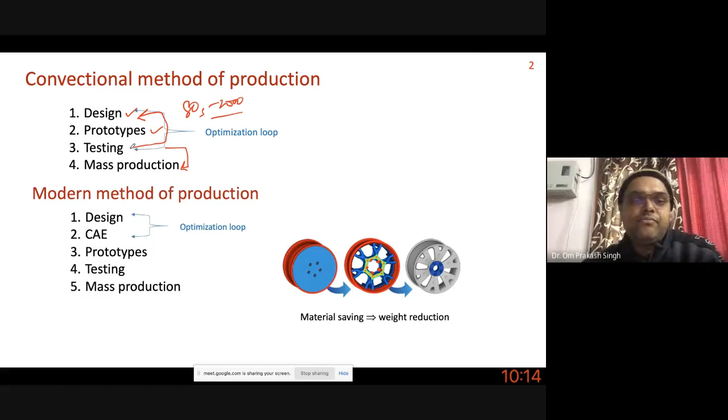But now things have changed, and changed on a large scale. So how does the modern method of production work? Design is the same in the earlier process and the new process, but it has become more of a virtual environment, not using drafters. We use computer tools, design software, and after design we do the CAE. CAE is a general term for computer aided engineering. Whatever you do through computers is called computer aided engineering.

Here there are various methods. One of them is CFD, then the finite element method, and the boundary element method where you go for noise, and many other processes and tools. In CAE you look for all the design related issues, then change the design and come back from the CAE result, because CAE, whether CFD, FEM, or any other method, is a tool to take decisions. If you cannot take a decision in industry, there is no point in doing CAE. CAE helps you take a decision from which you can actually modify the design.

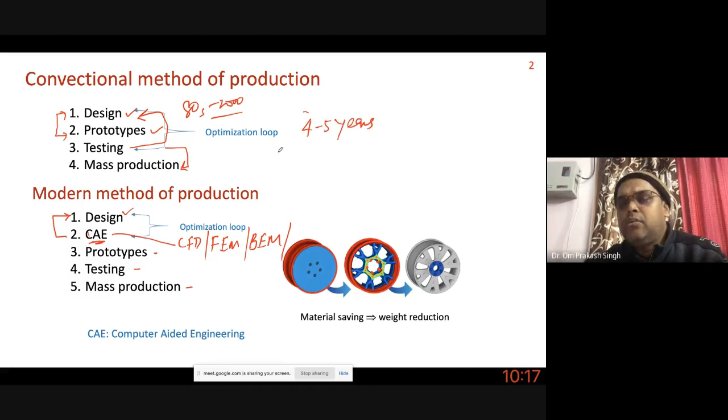Whereas earlier, before mass production, the design iteration used to happen between design, test, and prototypes. With the introduction of these new CAE methods, the life cycle of a product, from the concept idea till mass production, has reduced drastically. To give you a scale of reduction, let's say you are producing a car. Earlier it used to take 4 to 5 years considering all the design concepts, then slowly it came to about 2 years.

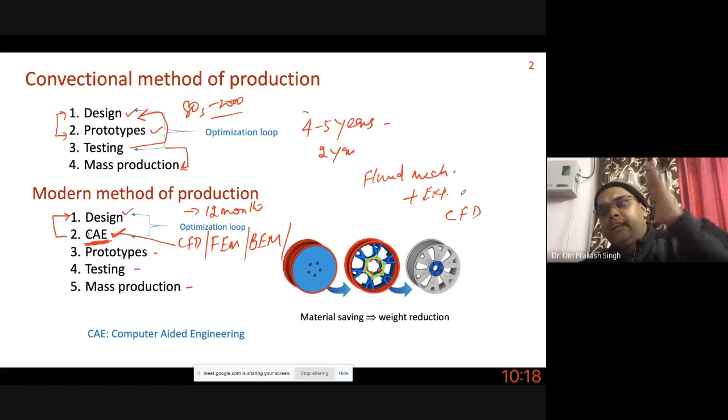Now, with CAE help, one can launch a product in less than 12 months, if the industry has skilled CAE professionals. But unfortunately in academia we don't generate skilled people who are well versed in CAE tools. Mostly in academia we are stuck with teaching fluid mechanics plus a little bit of experiment. And CFD is taken as rocket science, which only comes in your 8th semester as an elective, and in some colleges it's offered and some it is not.

But with the advent of computers, and the tools having become so easy, CFD and fluid mechanics should be taught together in the same course. And for that, the faculty will have to upgrade their skill level so they can teach both fields in the same course. With CFD we can do optimization, or for that matter we can do optimization with the finite element method on structures.

But one should not confuse FEM and CFD. Once somebody says FEM, the first thing that comes to mind is that it is a structural thing. But no, the finite element method is one of the ways to solve CFD, to solve the governing equations of mass, momentum, and energy, which are the conservation equations. CFD basically uses the finite volume method. Of course, I will not be covering anything as such.

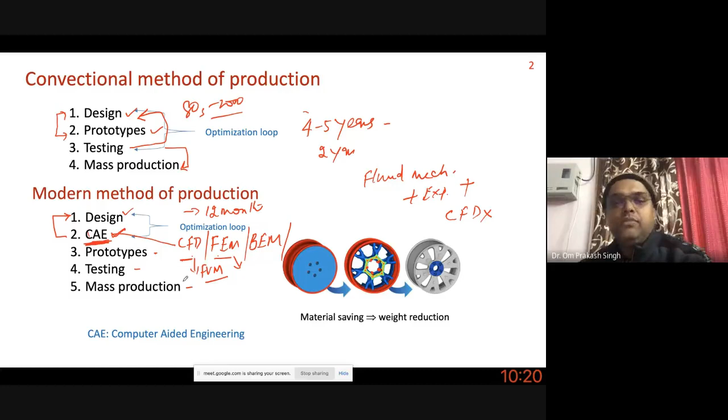Okay, but generally FEM is preferred for certain kinds of problems, structural problems, because of their efficient way of handling the displacements and all the things. Whereas finite volume and CFD methods are generally used for fluid related problems because they conserve the energy in the entire flow field.

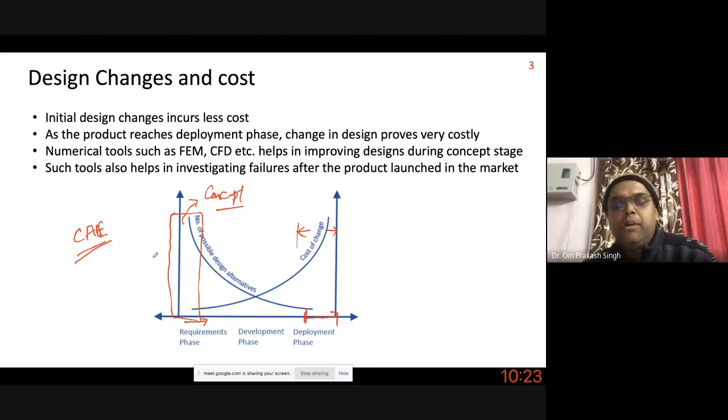Freshers, the graduates from colleges, hardly have any experience. This is one of the reasons industry doesn't prefer freshers. But one can ask the question: unless they work, where will they get the experience? That's the simple question. But while working in industry, I realized that even if industry is willing to hire a fresher, the problem is it takes about 3 years to train them on these CAE tools or other related stuff. After 3 years, an individual can actually start contributing to the growth of the company.

But the problem is after 3 years, the person who has got this training thinks that he deserves more, and he will write everything in the biodata, whatever training he has got, and he will switch over. So industry doesn't prefer freshers because they leave after some years. They'll change the company for many reasons, and one is the salary, because now they have learned everything. So if these years can be reduced in academia itself by giving them proper training, only then can we bridge the gap between what industry needs and what we are actually training them in.

In fact, the main purpose of producing engineering graduates is so they can do some engineering work, as simple as that. But many of them are not aware. That's the unfortunate part. I'll go to the extent that many are not even aware how to operate a proper operating system, how to rename a folder, how to install. I'm offering a CFD course.

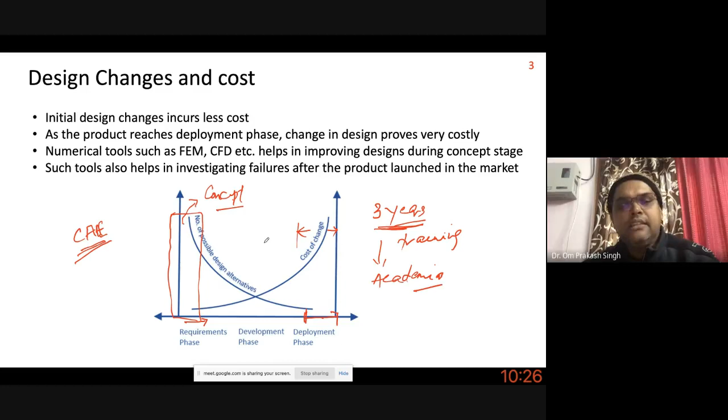So spend a lot of time with your computer, doing this, then doing this, install, uninstall. Only then you will have more free hand in doing a lot of other stuff. Okay, and this is one of the reasons: if you're not well versed with the computer, then learning the software is a remote possibility.

Okay, so when you do CFD, what we need to run a CFD model is, as I said, some pre-processing technique. You need to design the CAD, okay, computer-aided design. In academia, we deal mostly with simple geometries. But when you go to industry, the geometry and the problems become more complex. Okay, so after CAD generation, we go for mesh generation.

So this is a must in the CFD process, and for most industrial problems, 80% of the time basically goes into just setting up your CFD model. Okay, just pre-processing the CAD, then going for mesh generation. I'll also talk about how to generate good quality mesh. Okay, and then post-processing takes not much time.

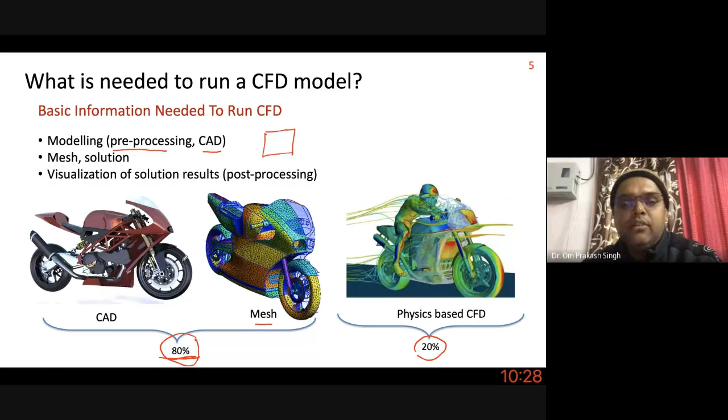Of course, now our computational resources have improved a lot, and with experience, this post-processing time has been reduced drastically. Okay, since 80% of the time goes into our pre-processing part, I'll be focusing more on the mesh generation pre-processing technique, so the audience can make a guess what needs to be done and what needs to be learned to develop a good CFD model.

Okay, so now why is meshing done? Let me explain what is the importance of meshing. So when there is a pure surface or a CAD model, basically it has an infinite number of points. A surface can have an infinite number of points. Okay, and the degree of freedom here, see, I've written here, is 6. Basically, I use the same example to teach a finite element model, where the degree of freedom is the unknowns. So here you can think of the degree of freedom as the number of unknowns.

So at each node, suppose there are, let's say, equations: one conservation equation, and basically 3 momentum equations, and if you are solving, let's say, the energy equation, there will be one more unknown, temperature. So 3 momentum and 1 temperature equation, 4. Okay, so you have U, V, W, and T, the 4 unknowns. Of course, pressure will also be there, but we use the continuity equation to iteratively solve the pressure.

So at minimum, when you solve a fluid flow, a heated fluid, you need 4 unknowns at each node to be solved. So the degree of freedom in that case will be 4. So if the number of nodes keeps on increasing, the degree of freedom also keeps on increasing. So when there is no division, no meshing, it will have an infinite number of equations, because we solve each equation at each node. Okay, so this is impossible when you don't mesh.

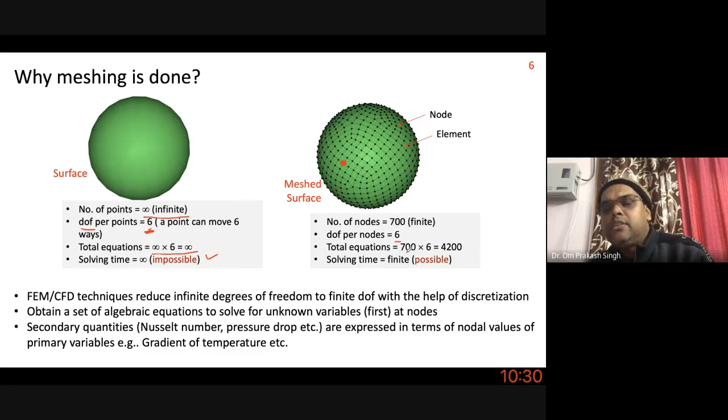But on the other hand, if you have a finite number of nodes and a finite number of unknowns, solving the total equations also becomes limited. Okay, and it all again depends upon the resources you have. Now one can think of using a very fine mesh. Fine mesh means the spacing between the 2 nodes is small. To get better results, the spacing can be reduced by using a small grid size. In that case, the number of equations will also be very large.

So your computer will slow down, because it will solve each equation; each node you have to assemble in a matrix. Then you have to solve it with some special algorithm. In CFD, we call it TDMA, tri-diagonal matrix algorithm. Okay. So again, there is a compromise between the number of nodes we use and our computational resources.

But there is one more issue. One can argue how many nodes and elements, what is the element size, how many total nodes there will be. Because there is no set, hard and fast rule for what the element size should be or how many nodes one will use.

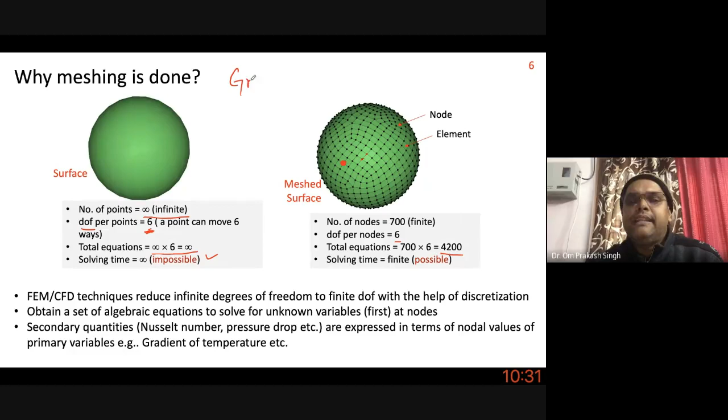Okay, so what we do in our research, or even in industry, is to go for what is called a grid independent test. So here, for a given variable, let's say this is the number of grids, and some result. The result may be a temperature, it can be a Nusselt number, it can be anything.

So slowly, if you keep on increasing the grids, after some time it will become flat. So there is no variation. So from this point onward, you can assume that further increasing the grids is not changing the result. So that point, or that number of elements, you can use further for your next level of analysis and post processing.

So to reach that, you have to keep changing the number of grids, and slowly you will reach a number of grids where maybe there will be a slight variation of 4%, 5%. Beyond that, there is not much variation. So you can select that number of nodes to present your result.

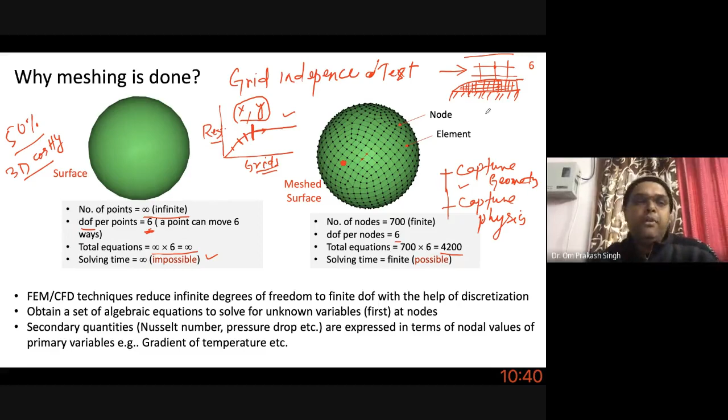So first thing, you think that your 3D problem should go to 2D. Even in industry, I have solved a lot of complicated problems which usually people do in 3D, and I have converted them into 2D. Of course there was a lot of criticism initially, but finally when the end results came, you feel very nice from within.

And even industry, let's say General Electric, GE, they are now into a lot of fields, and initially their main business model was aerospace. Even today there is a group who first does the simulation in 2D models. There is a group who first does hand calculations, initial designing.

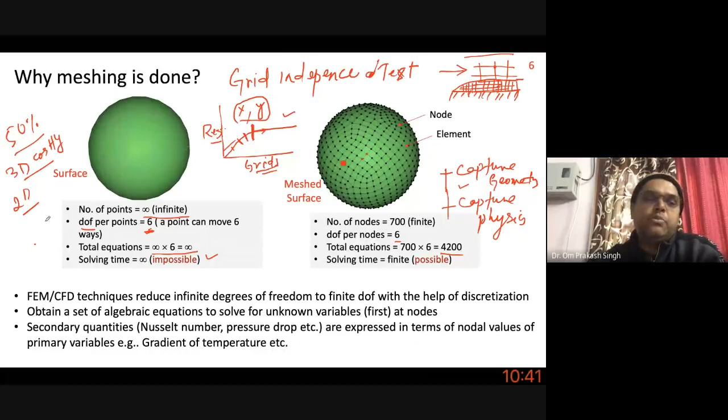After initial designing, the design will go to a group who does only 2D simulations. Then after months of 2D simulation, finally they will pick 1 or 2 designs which they think require 3D, then they develop a 3D model to check that whatever is done in 2D and the theory is fine. So always go out of the box. It always pays in the long term if you think out of the box. There's no hard and fast rule that you solve a problem in a particular way. That's where your challenge of thinking out of the box comes into place.

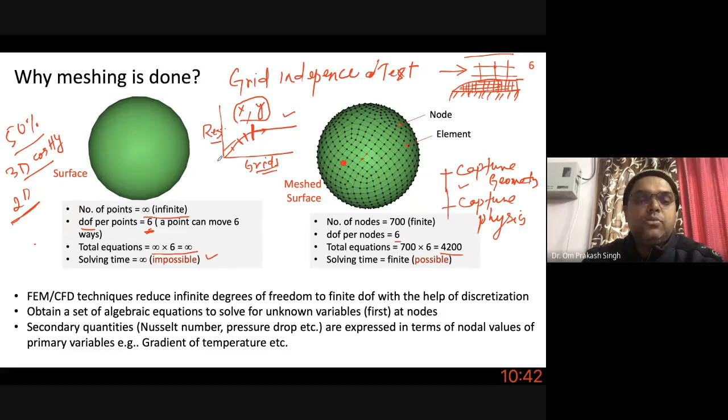So as I said, the purpose of doing meshing is also to capture the geometry. Let's say this is your geometry, and for the sake of representation, if you use 3 lines, we are capturing only 41% of the given area. Now with 4 lines, the percentage captured increases, and slowly as you keep increasing, these lines are nothing but the grid size. In CFD we call this a cell, and this is called a node. If you keep increasing the number of nodes, you are going to capture the geometry in a better and better way. So as the number of nodes increases, the area which we capture also increases.

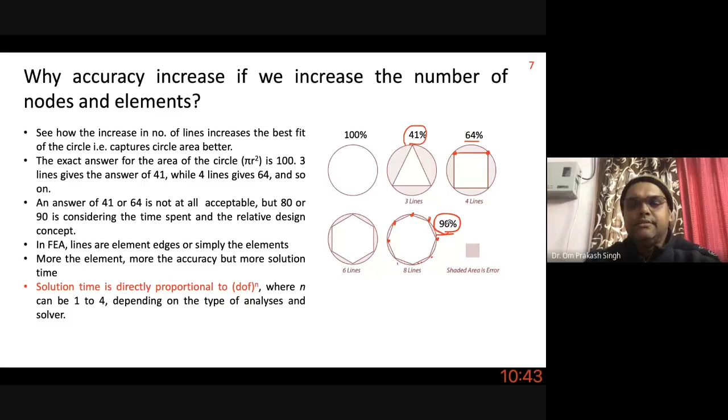So before I go to show some demonstration, there is also something called element quality in CFD. When you are using a triangular element, ideally we prefer it to be 60 degrees. These kinds of elements are also fine up to some extent. One side can be a maximum of 2 times, or maybe 2.5, or in some cases we use 3 times. In the boundary layer we use 40 times.

As I said, the elements in the boundary layer are basically quad elements in 2D. Quad means quadrilateral, or in 3D it becomes a hexahedral, a brick. In Fluent, I think they call it an inflation layer. And if you're using software like STAR-CCM+ for CFD, they call it a prism layer. Basically, they are all dealing with the boundary layer. And in other regions, apart from the boundary layer, ideally we prefer a uniform square element.

Okay, up to 4 times stretching is allowed, 1:4 ratio. And a little bit of distortion is also allowed. Instead of 90, you can have 60. But if you are doing a mesh in such a way that the angles and the stretching are more, then what will happen is your model will not converge. Convergence in the sense that when you run a model, continuity with iteration.

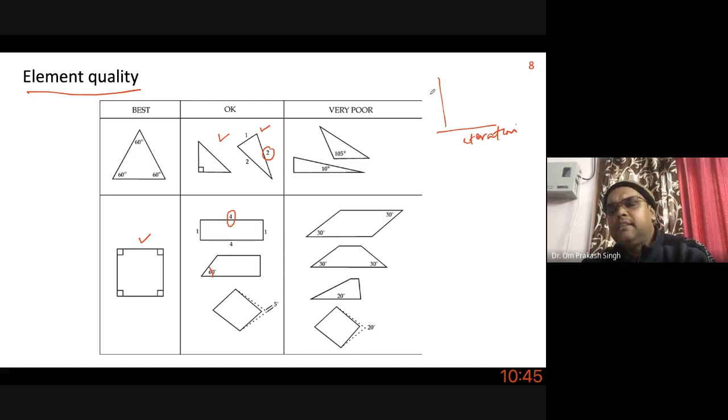With iteration, it can be continuity, it can be energy. So slowly with iteration or time, it should come down. Your residuals should come down. Ideally we prefer the order of 10 to the power minus 4, or minus 6, depending on the problem. When your convergence reaches that level, you can say your model is converged. But in some cases, students report that it keeps changing, it fluctuates, and it never comes down.

So the first thing you should look at when there is a convergence issue is your mesh and mesh quality. Then you should look at other things, like selecting a suitable turbulence model, or whether it is a laminar problem, whether you have applied proper boundary conditions, or sometimes you need to check the time step, or steady state. Those things come later. But the first thing when you have a convergence problem is always to look at element quality. This is the basic.

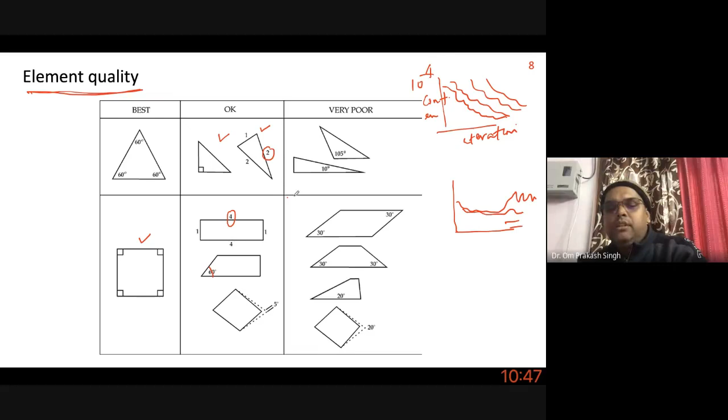This is the founding block of your CFD model. First the mesh comes, then boundary conditions come. So you should aim to generate a quality mesh whenever you develop a model, or whenever you run into a convergence problem. I'll also show you how mesh quality can distort. There are some terms to measure mesh quality. One is called skewness.

Skewness is basically, let's say in a quad element, if you draw lines through the midpoints of the element, the angle formed between them should ideally be 90 degrees if it is a square. But some deviation is allowed, and it should preferably be less than 40 degrees. These checks are inbuilt in software nowadays, so with just one click you can check it.

Then, as I said, aspect ratio. Aspect ratio is the maximum length divided by the minimum length. We allow 1:4 to some extent, and in the boundary layer we go up to 1:40 as well. In the boundary layer it is possible because the flow is aligned along the wall, so it will not be much of a problem. Usually, if you develop a boundary layer mesh using software, it is built in to allow that ratio. Otherwise, if you cannot have this much stretching, you will have to put a lot of mesh near the boundary layer even for small or simple problems. So this takes care of all that.

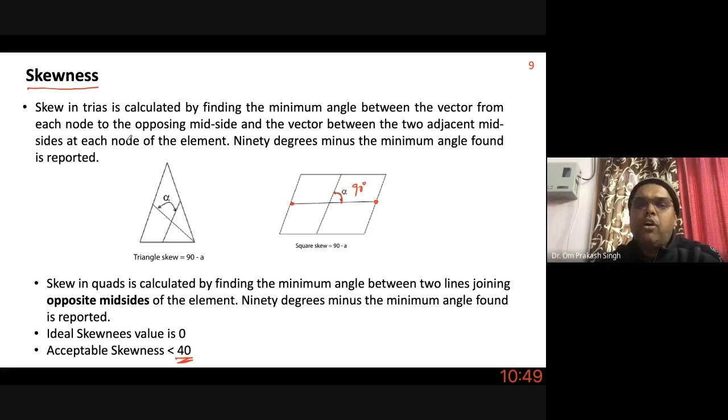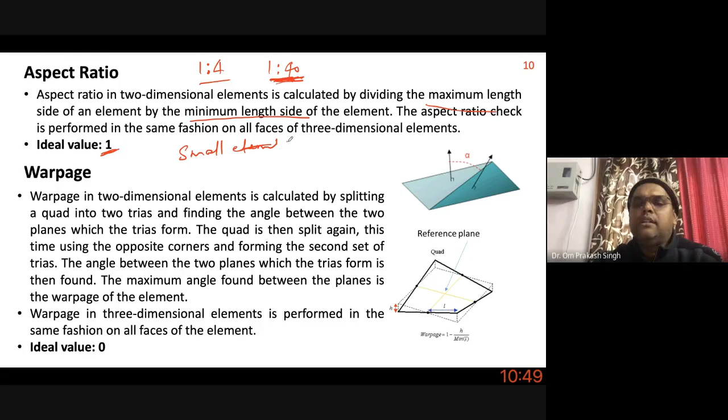The ideal value should be 1. How do you get this ideal value of 1, for aspect ratio or skewness? The best way is to use a small element or grid size, whether it's a grid, an FEM element or shell. If you use a small grid size for a given surface, the aspect ratio will automatically approach 1. As simple as that. You do not have to worry.

But when there is differential meshing, where some surfaces require fine meshing and some require coarse meshing, you have to be careful. We allow 1:4 to some extent to make up the transition zone. If you go for 1:10 or 1:20, your elements will automatically distort.

There is one more element quality check, which is warpage. To make you understand, ideally our element should be rectangular and on a plane. But if there is curvature, let's say a sphere, and you are trying to capture this geometry with a mesh from here to here, since the mesh is trying to capture the geometry, it will also change; it will curve.

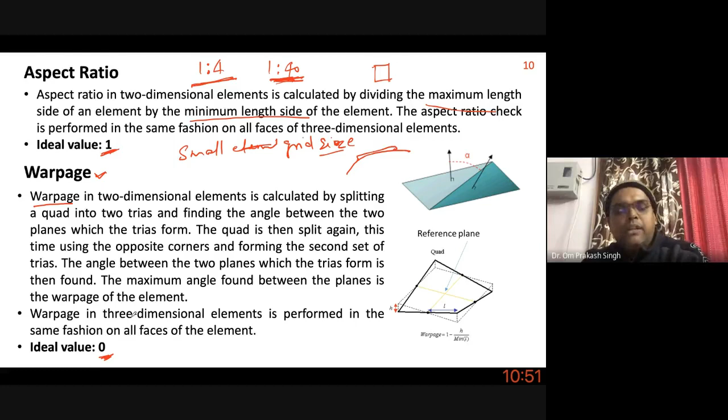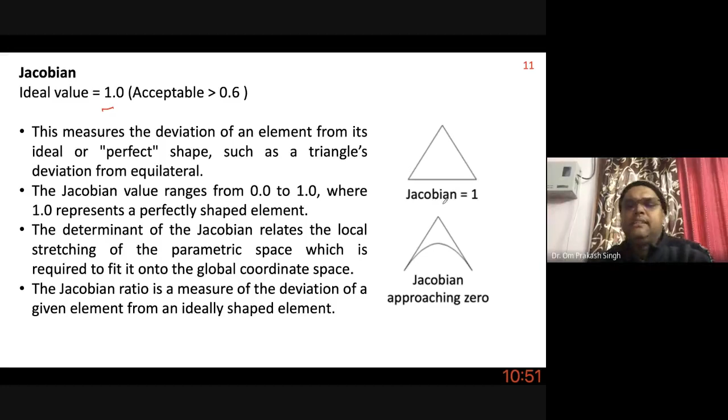So basically warpage is the degree of curvature the element takes, or how far it deviates from the plane. Ideally it should be 0 in most scenarios, but some variation is allowed. Similarly, there is the Jacobian, whose ideal value is 1. It is basically the shape deviation, how far it deviates from the original shape.

Okay, so to drive home a point, see, this is the boundary layer. This video, I hope you must have seen in your fluid mechanics course. The white color is nothing but the hydrogen bubbles generated by putting an electric wire in the fluid, and if you pass the current and make the flow in the horizontal direction, it will generate uniform bubbles.

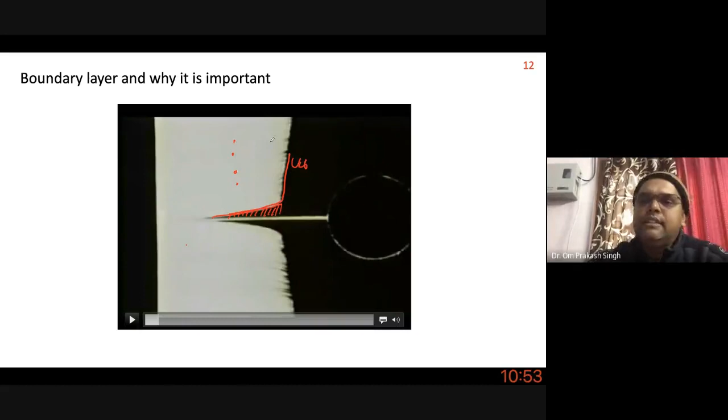Now there is a surface; the white color which is visible is a surface having some roughness. Because of this roughness, the fluid will basically form a boundary layer. You can see from here, and going away, this is the U infinity. In this small region, this is the boundary layer. Away from the wall there is not much change; the velocity is the same.

So if the velocity is the same, you can see this shear stress tau, which we study in Newton's law of viscosity, tau = mu del u by del y. It says the gradient, or change. This derivative is nothing but a gradient. This gradient is basically 0 here, because everywhere the velocity is uniform. Only in the boundary layer is there a change in gradient.

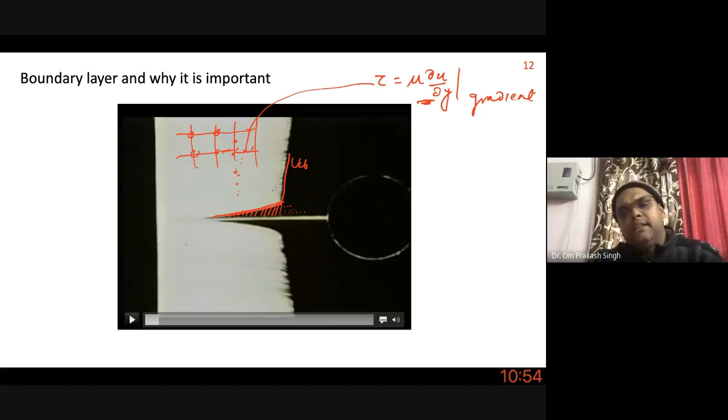So when you do CFD, you have to put more effort in this region. The rest of the region can have a coarser mesh. If your mesh is like this, it can be like this; it doesn't matter, because the velocity here and here is almost the same. It's not affected by anything else. But in the boundary layer, you have to put very close nodes so that you are able to capture this variation. So most of the resources we put in the boundary layer. Okay, I will not go much into detail.

Before I go for some demonstration, I will explain what the fundamental problems are that we study in heat transfer and fluid flow. Just think, you must have studied a heat transfer course, fluid mechanics course, or some related courses. The purpose of

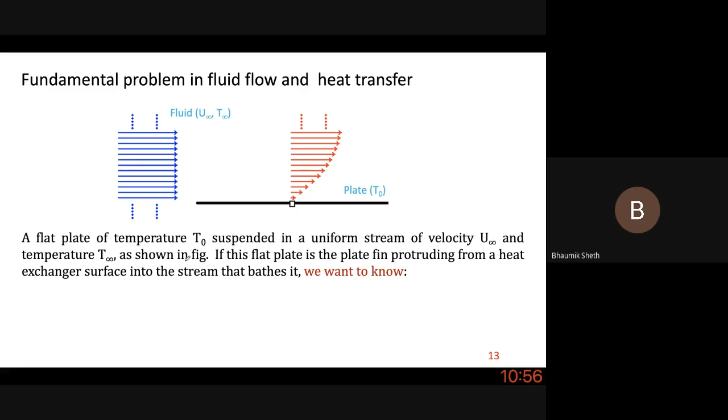Just hold up. Any question? Hello, sir. Please unmute your mic, sir. Oh yeah, sorry.

Okay. Now see, the purpose of studying heat transfer and fluid flow is only two. You will be surprised: you have read such a thick book of fluid mechanics and heat transfer, so how can it be only two? There are various chapters, isn't it? So let me show you how only these two things are there, even in CFD which we study. Now there is a plate and there is a fluid flowing over it.

What could be the purpose of studying this plate? This plate can be anything. It can be the surface of an aeroplane, the surface of your laptop, the surface of a PV panel. It can be anything; this is a general flat plate. Now, when there is flow over it, the first thing you should know is what is the net force exerted by the stream on the plate, or in other words, how much force we need to keep the plate in its position.

We call it basically drag force. Of course, drag and lift are connected. This is the basic purpose of studying fluid mechanics; your entire fluid mechanics is devoted to this force. One can ask how it is possible. You have studied fluid statics, fluid dynamics, shear stresses, pressure drop. Just think, these forces, pressure drop, losses, everything can be converted if you know how much force or shear stress there is.

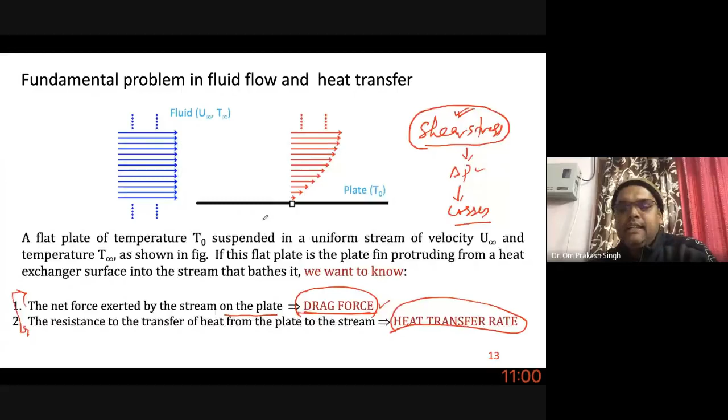Now let's see what you need to learn in CFD. To calculate the drag forces, shear stress into area is the force, and heat transfer is nothing but heat flux into area, where area is width into length. If these two are known, everything in fluid heat transfer can be derived. What we don't know is the shear stress and how much heat is transferred. To get the shear stress, you need the velocity gradient, and to calculate heat transfer, you should know the heat transfer coefficient. These are the two basic unknowns in CFD or heat transfer or fluid flow in general.

Now if you scale it, this change happens only in the boundary layer, near the surface. So del u by del y changes from 0 to delta in the boundary layer. When y is delta, the velocity reaches the free stream velocity. So u changes from 0 near the wall to u infinity in the core of the flow. So in a scale analysis you can express this as u infinity by delta. So to know shear stress, what is needed?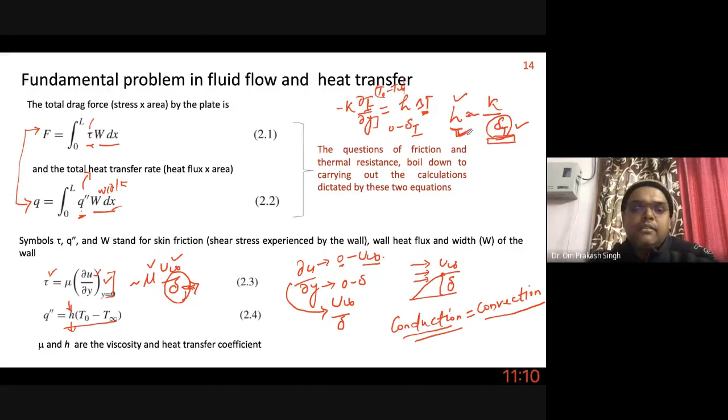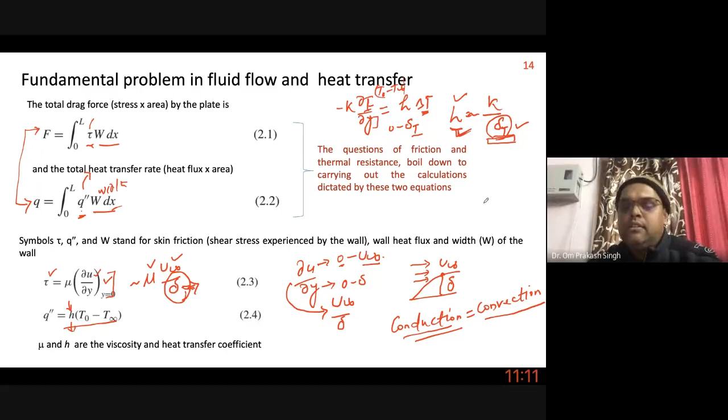So the entire heat transfer which we study will not yield proper results in CFD modeling. So you should be careful where to put your mesh. I think I don't have much time. I have already covered different boundary layers. So let me directly go to show you some demo. Okay.

So let's say, I think I don't have much time. So let's say a simple flow. What kind of strategy ideally we should have? That I want to tell you. Here, this is a simple 2D geometry, and there is a flow from inlet to outlet. And you want to develop a CFD model of this. You can get the geometry, of course, but how to do the meshing?

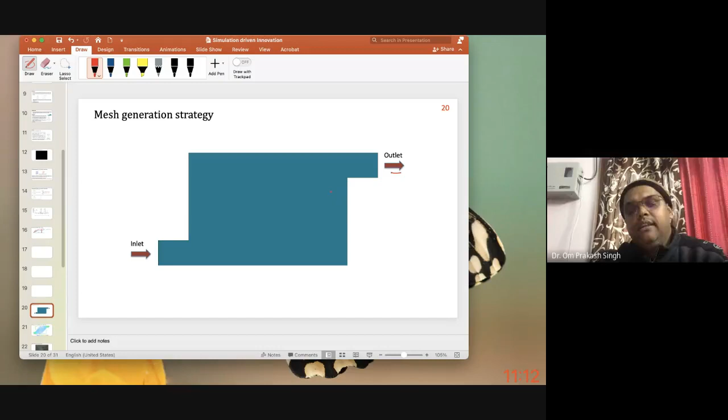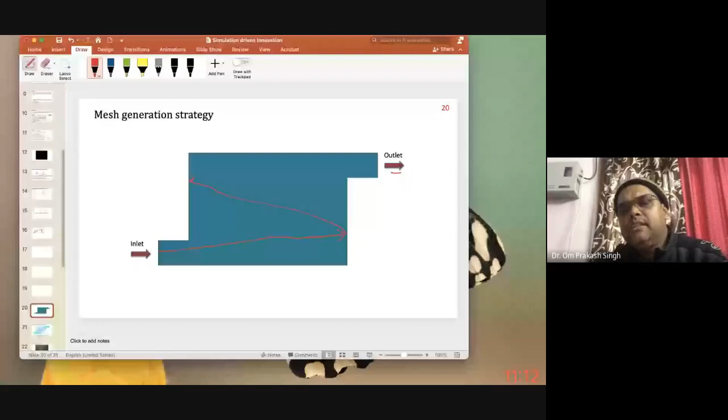Ideally, before doing any CFD, what one will think is the fluid will go here first, directly hit the wall. Then it will hit this wall, and it will come back here. This will be the general thinking. But again, that is not the way the fluid behaves. Just a minute.

So without worrying about how to do the meshing, first one simply has to use a coarse mesh without thinking about the boundary layer or where to refine the mesh, and do the first simulation, which will be rough or partially correct, not 100% correct.

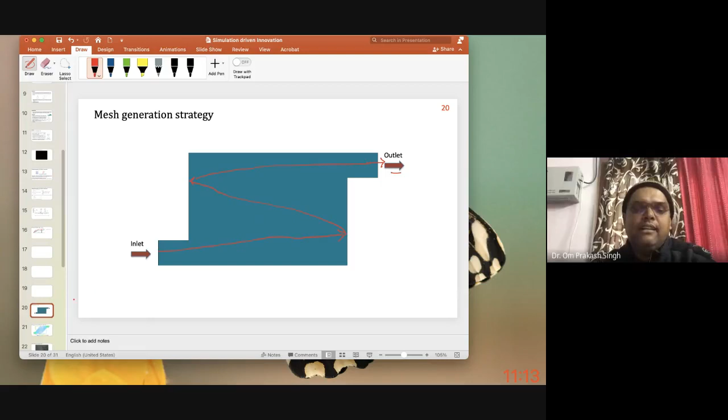So let's say I have done the simulation here. Now see how the fluid behaves. It's very different from what we thought. The fluid basically has a tendency to take the shortest path. So it will go this way, and the fluid is not striking this wall, even though the fluid is coming horizontally.

Since most of the fluid is rushing diagonally here, there is a recirculation around this region. The fluid is rotating here, and the same way it is also rotating in this region. So you should develop a mesh which will capture your flow behavior. At the first instance, that will not happen. So in the second iteration, once you see the fluid flow, come back and change the mesh. Let me show you in software.

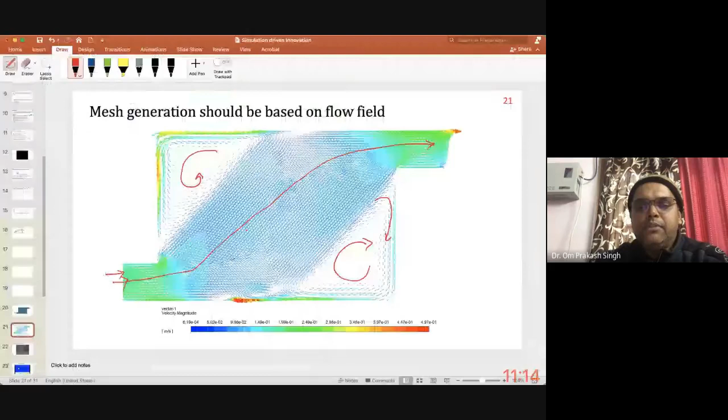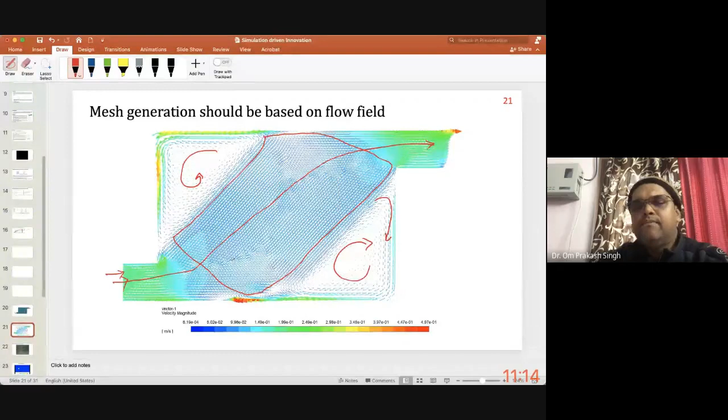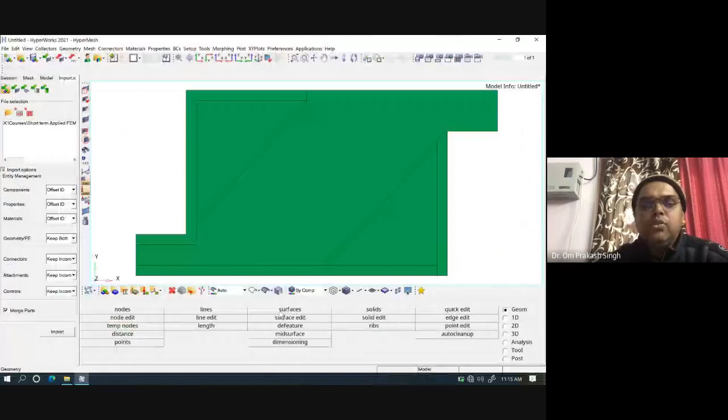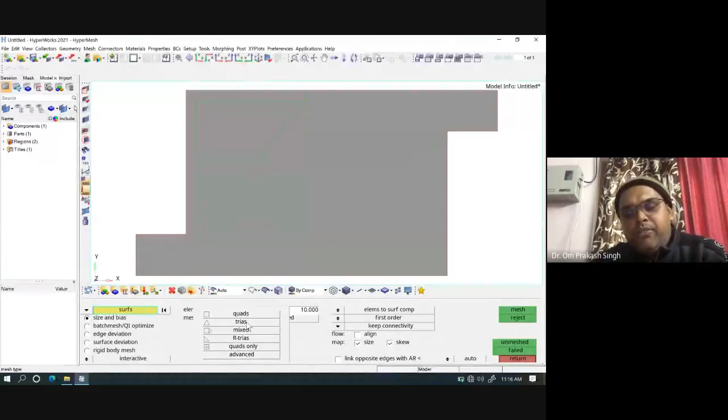Since it's a 2D problem, there are quad elements, so you can use quad. Triangular elements are preferred in regions where there are more reverse flows, let's say behind a cylinder, where a very fine triangular mesh captures the wake region. Quad is better near the boundary layer, or where the flow is more streamlined; quad meshes are needed in those locations.

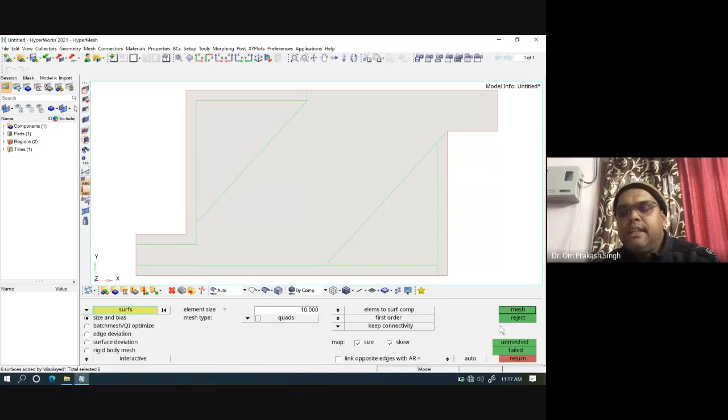But at this point, it doesn't matter what mesh you are using. In the first simulation, without worrying about quality or convergence, you simply have to mesh. This is a coarse mesh. I'm using quad. Because of some geometry partitions, it's using its own algorithm to do the meshing.

This looks very coarse, so you can simply go for further refinement. Even in this case, it's automatically refining without my control; the software is taking its own decision. And if you are happy with this quad mesh, then you can do the first simulation.

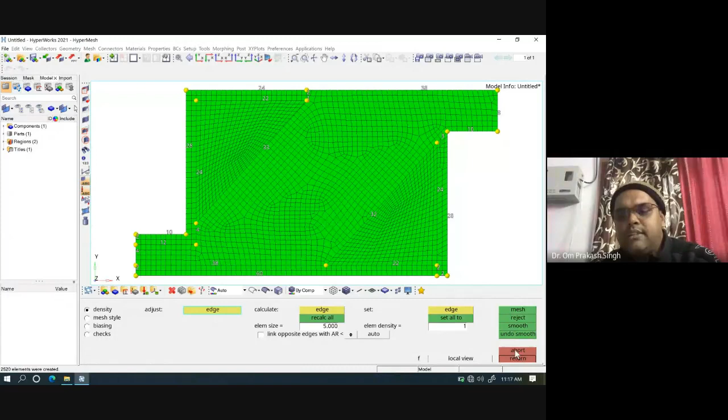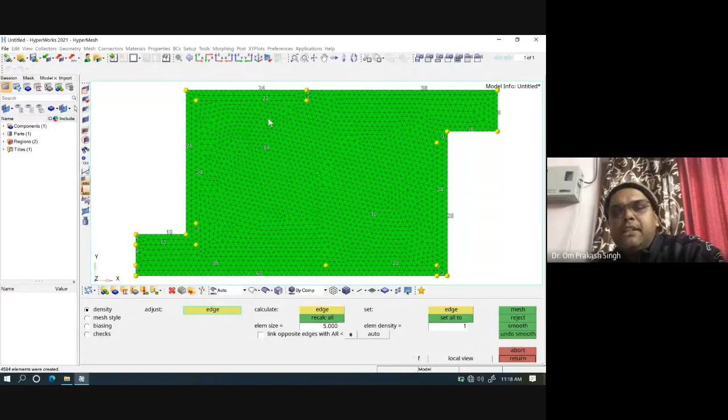If not, then you can change it to triangular, and also you can do the mesh. Now you see here in this case, since I have already done the areas and where to partition the surfaces, the triangular mesh is doing a better job of keeping a uniform mesh. Otherwise, let's say instead of 5 I use 20, and a quad mesh, a bigger element size.

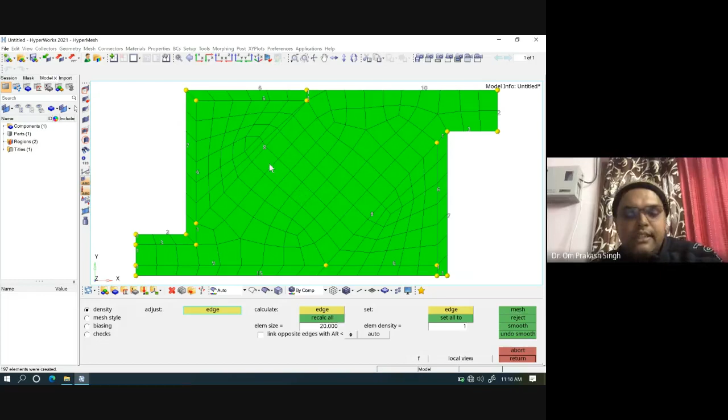So now you can see, as I said, in some regions this quad is already distorted, and it is beyond our limit. Some triangular elements, you can see here, this shape has already gone. So this element may create a divergence problem, because this is not okay. In some locations also you can see here, I hope it is visible to you all, this shape has changed.

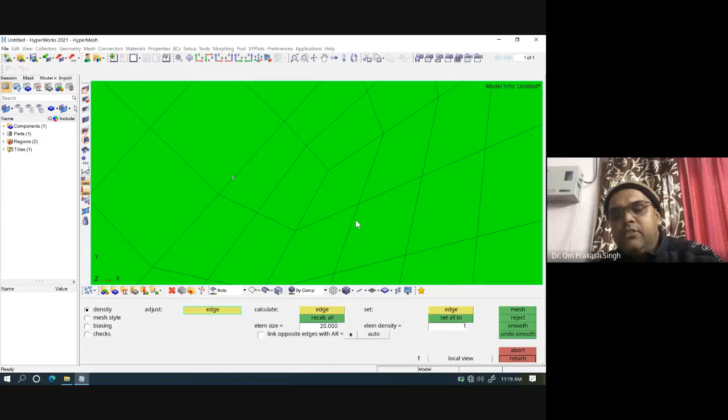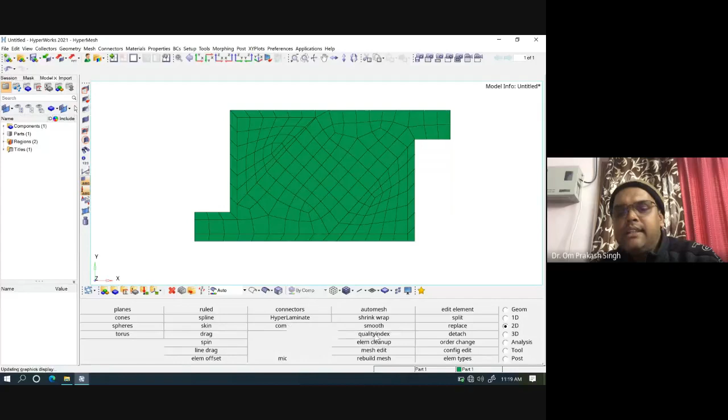So as I said, if you go for element quality, you will see a lot of bad elements, and all software will have provision to check the mesh quality. So if you go, this is the mesh and quality index. If I click on the quality, now you can see on the left hand side it's showing that aspect ratio is 2% failed. Let me zoom it out. The color tells these element qualities are not good, which you need to manually correct.

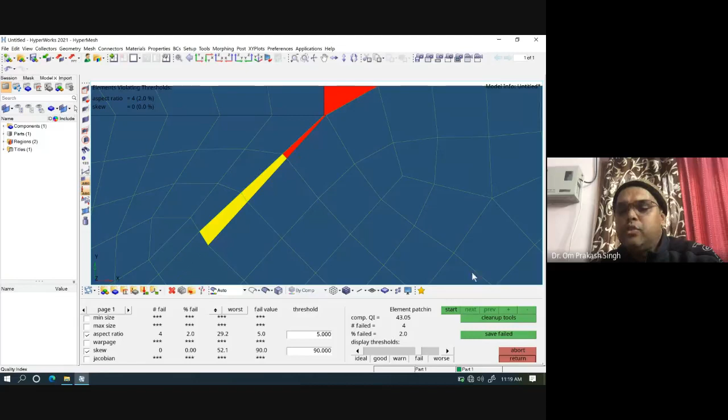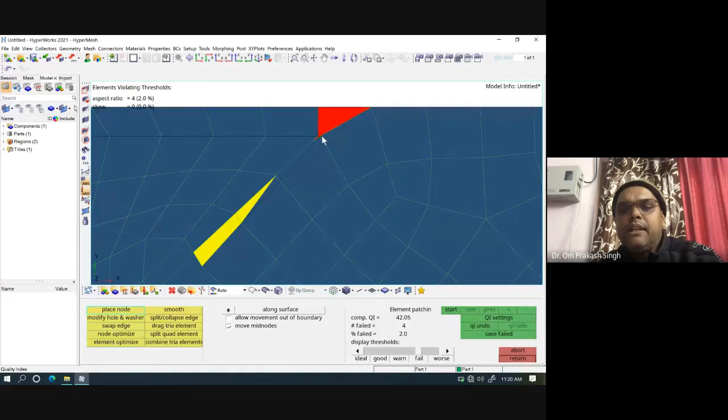So you can manually place a node. Let's say if you drag a node like this, see how the quality is changing, and further the quality is deteriorating. Now this becomes better. Now this element, I'll zoom for you to see, this is the quad element, which is actually gone. So it is a very tedious job.

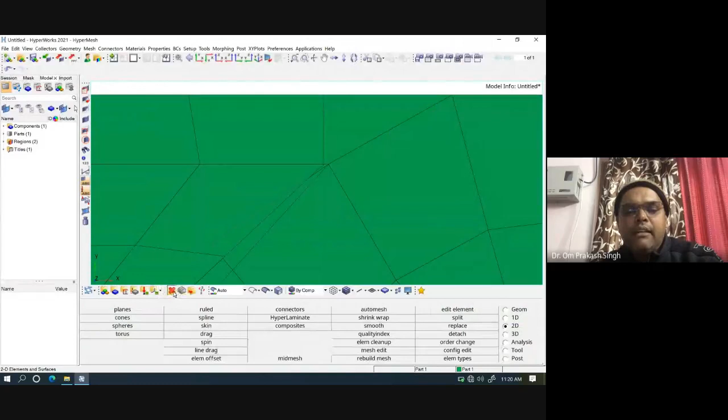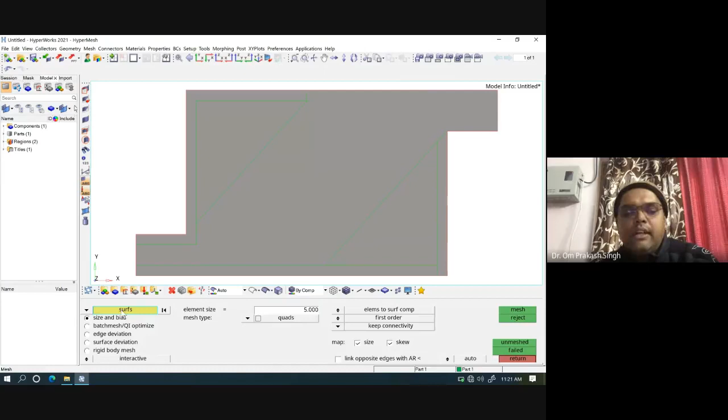So what you should do to avoid this problem is, I'm coming back, I'll delete the elements, and initially you take a little finer element, so the quality will be better. So instead of 20, same quad element, I will use 5. I'll select all the surfaces and say mesh. Now the number of elements have increased, and so is the quality.

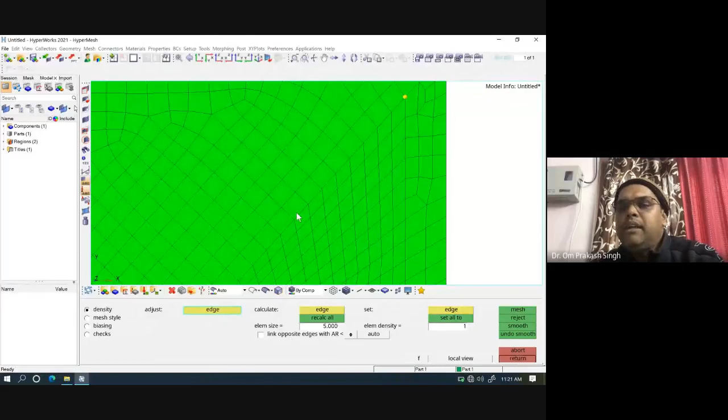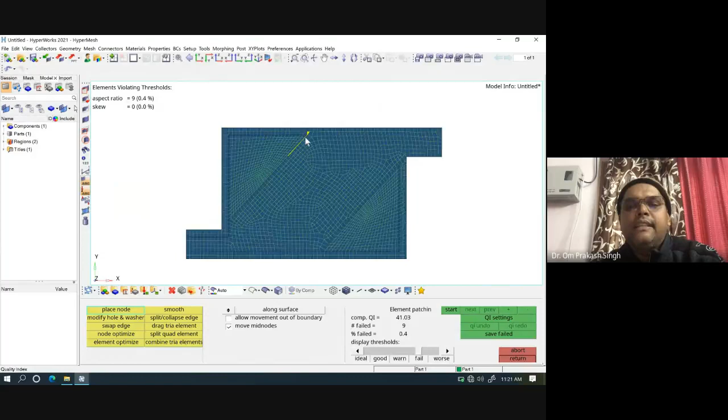Quality has become better almost in all locations. Ideally it is preferred to be rectangular if it is a quad element, but since the number of elements are more, distortion is not seen. Let me check the quality index, see here. There is almost no red color, but there is still some problem because of the definition of the surface. This yellow color shows the aspect ratio: 9 elements have a higher aspect ratio.

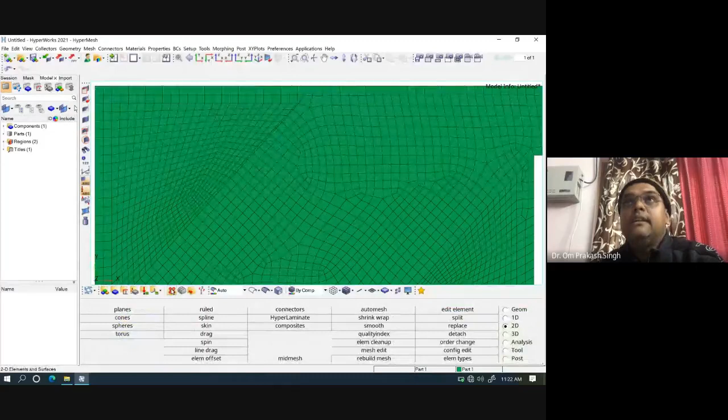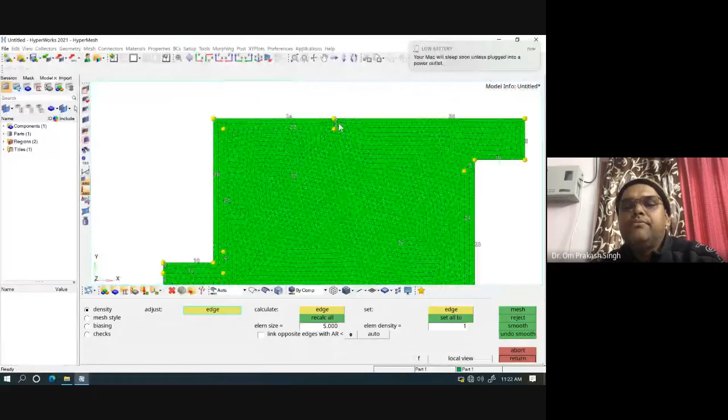So instead of quad, I'll delete, and let's say a triangular element is preferred. A fine triangular element will give much better quality initially; see, it's almost uniform everywhere, except certain elements are bad. But this is not the way. This kind of meshing is only for the initial simulation to check which is the critical region. So in the first run, you don't worry about all these things.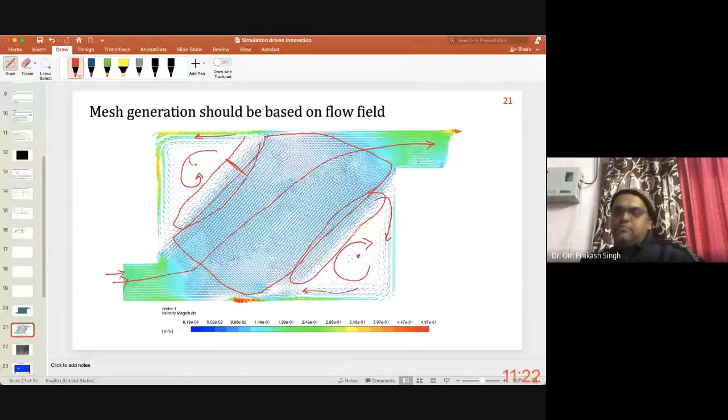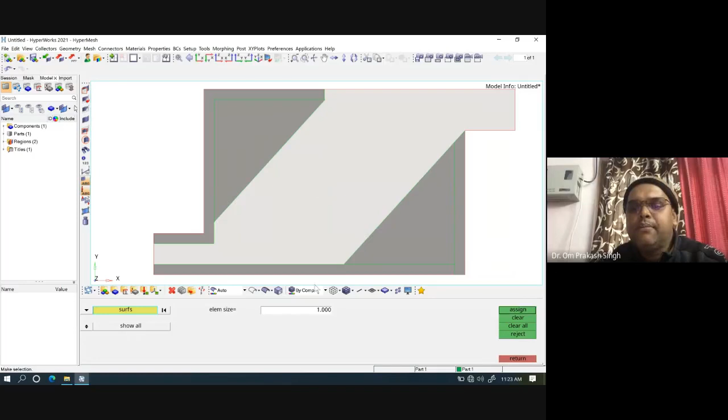And do the simulation. Now in the second stage, when we come back, you can say this surface has an element size of 2, for example, you can assign. I'm just showing arbitrary element sizes, but you can take later grid dimensions. This should be 4.

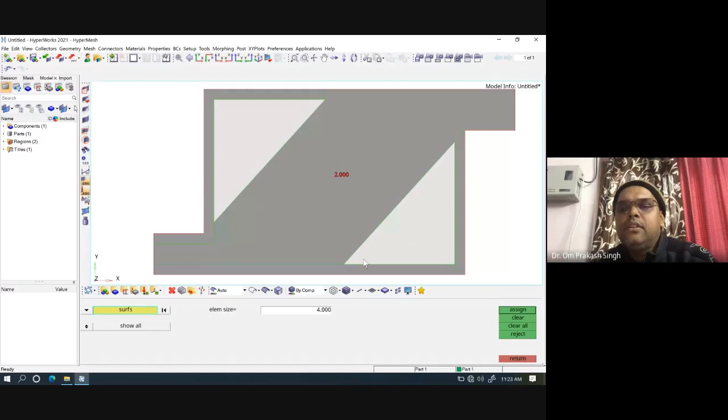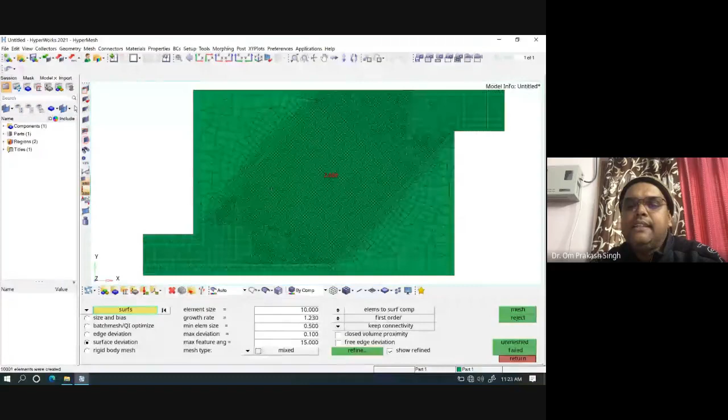Or let me not assign only this. I will say that only the core region will be 2, the rest will be with a higher mesh size. So if you do the meshing, this is a mesh where I have refined only near the region having higher flows.

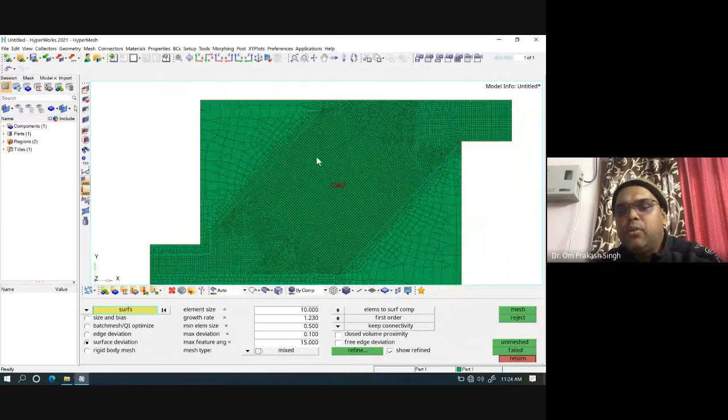You can see the mesh is non-uniform, but I have kept a very coarse mesh here, thinking that my flow is not dominant here. But still this is not the proper way to do meshing, because there are regions near the wall which show higher velocity.

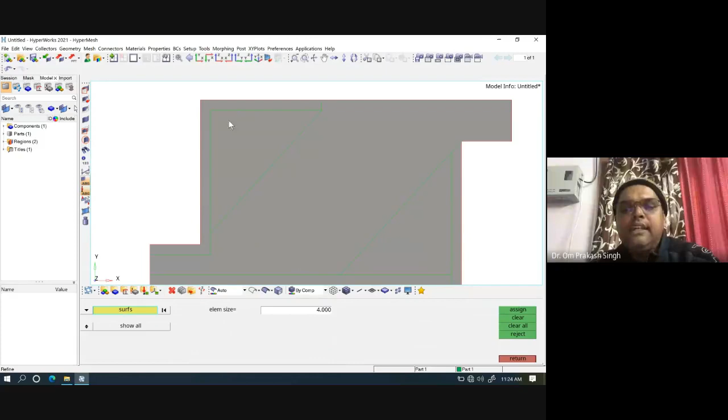So what I'll do is again you will have to just abort it or simply delete it, and again come back to your change meshing strategy. Since these are the elements near the wall, I will say let this be of 1 element size. The elements near the wall should be 1, and the element in the core should be, let's say, 5, and these 2 I'll keep as they are.

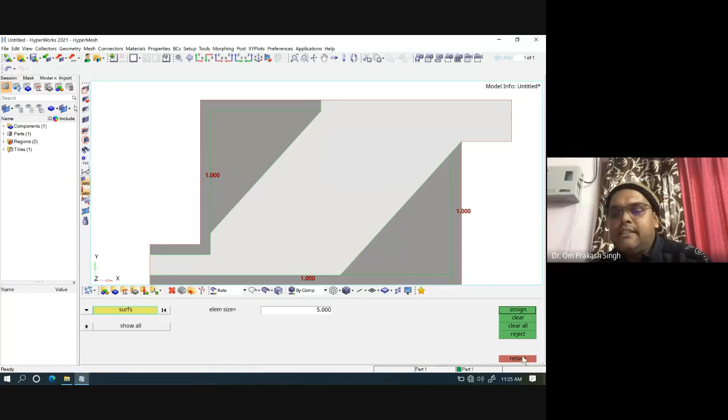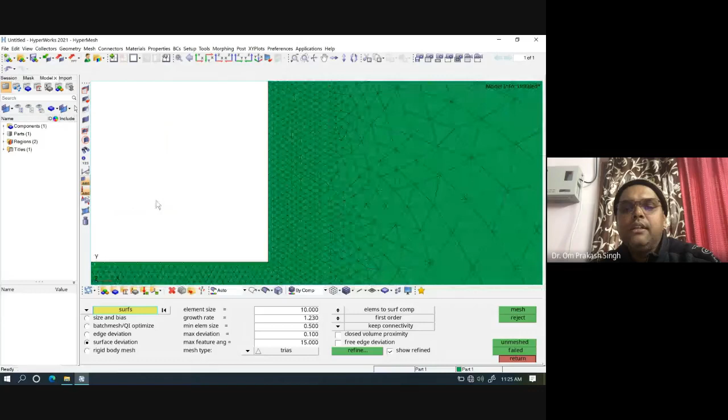Come back, and instead of mix, let's say you only use tria and select. Then because I'm using a different mesh size, now you can see that though my walls are refined here, ideally you should still put an inflation layer near the wall. All along the wall you need not put such a fine mesh, only the small region. But still you can see this region is not well refined.

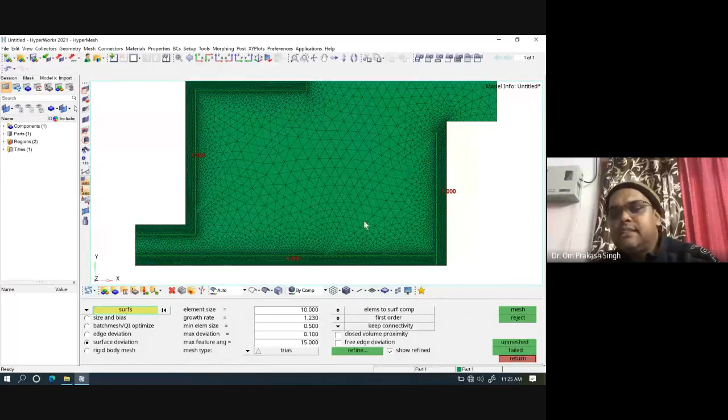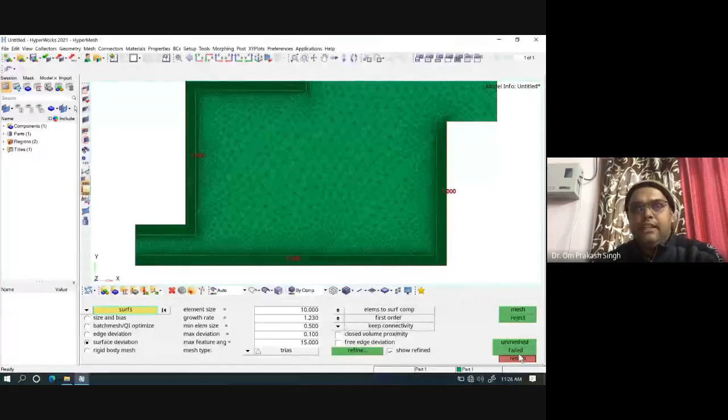So next, if you are experienced enough, you can select this line, because along this line we saw the high gradient. Take only the line and further refine. Once you reach a certain level of mesh, you should go for grid independence. The first thing you should do is the grid independence test: for a given boundary condition, monitor the values beyond which there will not be change, number one.

Once your grid independence is done, then you go for validation, because you never know whether the model you are using is correct or not. For that purpose, we validate either with published results in literature, or with your own experiment or an experiment reported by somebody else. For turbulent flow, generally 10 to 15%, or in some cases 20% variation is allowed. For laminar flow, around 5 to 10% variation is considered well posed with CFD.

Once you do the validation and grid independence, the two basic things, you can go for your own research or further design modifications and iterations using the same model. But the moment your physics changes, for example you introduce melting, say you validated with simple flow and heat transfer but you are modeling melting, then you have to validate the model again with similar physics. Then it will bring some authenticity to your model.

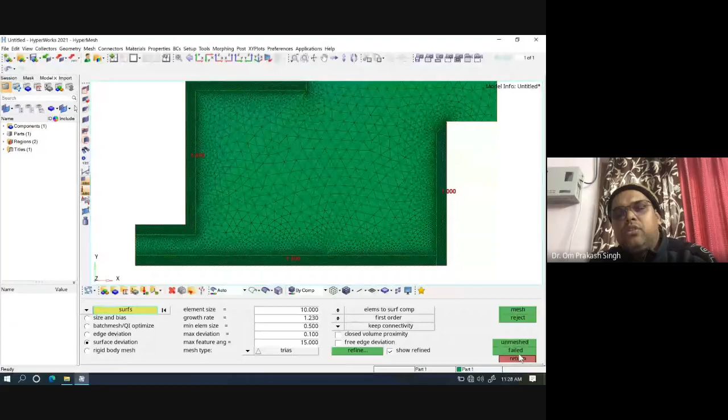There are other ways also. I think time is already over. There are many things I wanted to cover, but I think I have mostly given you a broad idea of what you should take care of when you do CFD model development.